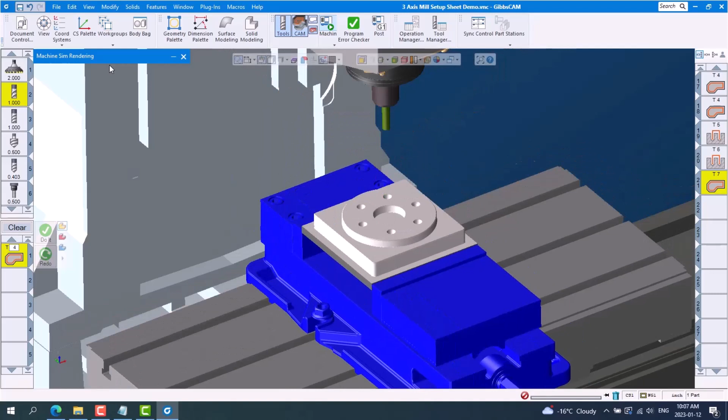In this tech tip, I'll show you how to produce a setup sheet from GibbsCAM that you can use to communicate with the shop floor to avoid costly downtime that can occur during the setup process. Downtime can happen when the setup person is searching for things like material, tools, holders, programs, and fixtures that were included during the programming process.

Setup sheets are an important communication tool between the programmer and the shop floor. Next, I'll show you the types of information you can include from GibbsCAM and how to customize the look of the setup sheet, which includes your very own company logo.

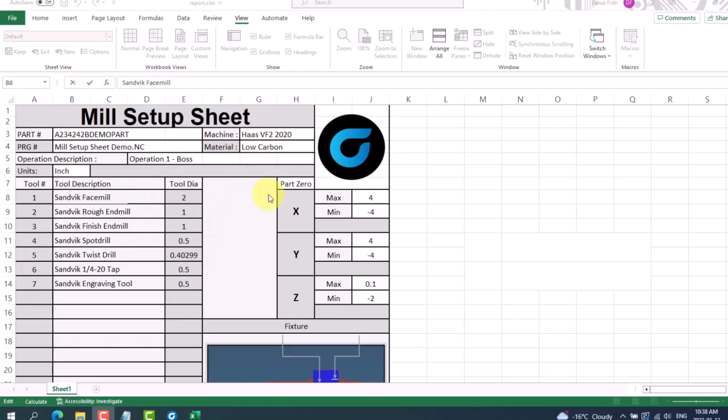Some examples of information you can include directly from GibbsCAM are part number, G-code file name, the operation description, units, tool numbers, tool descriptions, tool diameters, the machine, the material, part datum, fixturing, and an actual picture of the part.

Next, I'll show you where this information is coming from in GibbsCAM. If we look at our document control, this is where we get our machine from, our material, our units, the part, stock size, and origin.

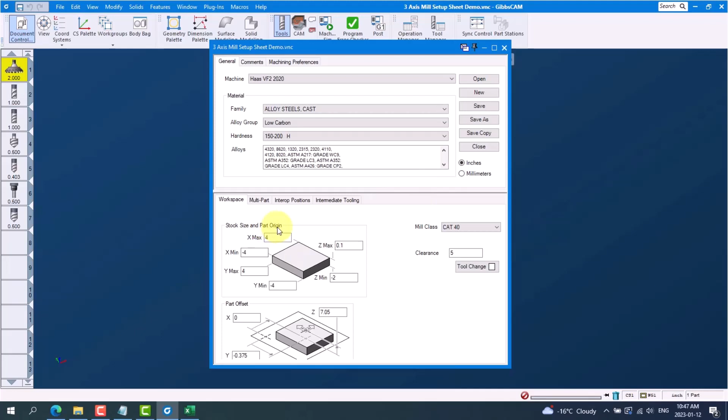And if we go to the comments tab, this is where we get the part number and our operation comment. Next, if we look at a tool, this is where we can get our tool number, our tool comment or description, and our tool diameter.

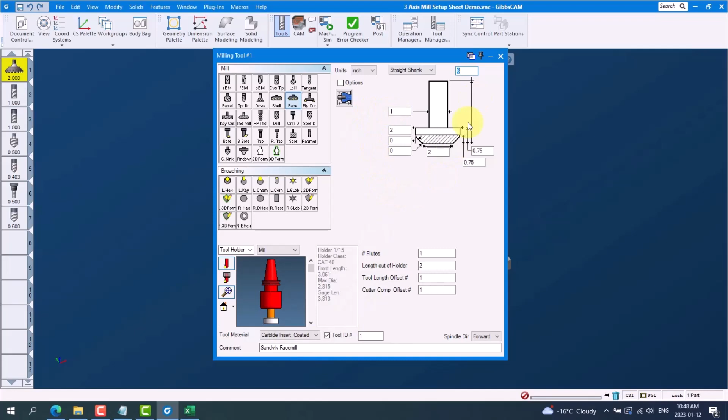Other information can be added to the setup sheet as it is fully customizable.

With a report like this setup sheet, there are two files required, an Excel file and a text file with the same file name. We have provided a setup sheet template. You can download the two template files in the description below and drag both of them into the report folder on your workstation shown here.

Here the two files are in the downloads folder. And now I'll show you the file path: C drive,

Program files, Cambrio, GibbsCAM, the current version you are using, plugins, data folder, report. You can copy the two downloaded files, the Excel file and the text file, and drag them into the report folder.

You will need to provide administrator permission to move to this folder. You can click Continue, and Continue for the next file.

And if I open the report folder, my GibbsCAM setup sheet is in there.

The Excel file includes the layout and look of the sheet itself, including titles and pictures such as the company logo. I'll now show you how to personalize it by copying your own logo into the setup sheet.

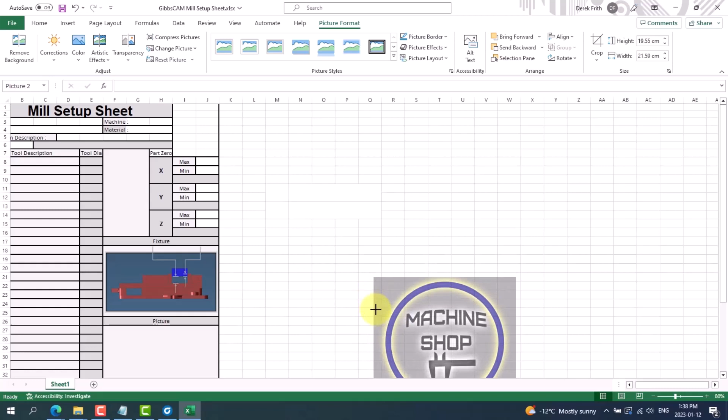It'll be inserted into Excel, which I can resize and simply put into place like so.

So once I have this logo in place and I'm happy with the look, I can save it. Go to File, Save. We now need to close Excel to allow us to copy the file over.

I'll copy the file from my desktop and drag and drop it back into the report folder. It'll again ask me to provide administrator permission to move to this folder. Click Continue, and we can see now that our setup sheet is in the proper report folder.

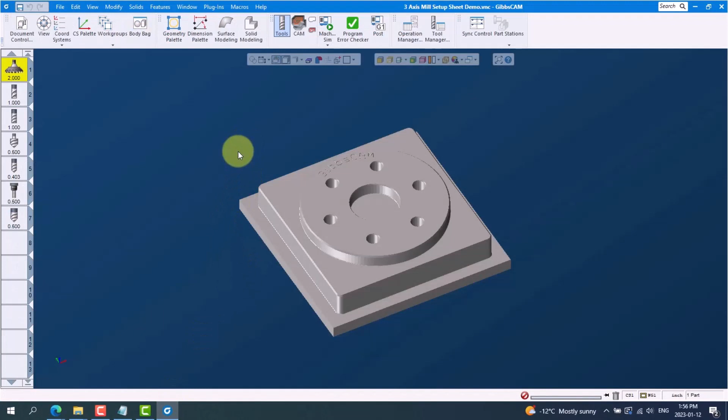And now we are ready to go back into GibbsCAM and follow these steps to print. We need to go to Plugins, under Main Tools, we go to Reporter. Click on the Custom radio button, find our new setup sheet in the list below, and press OK.

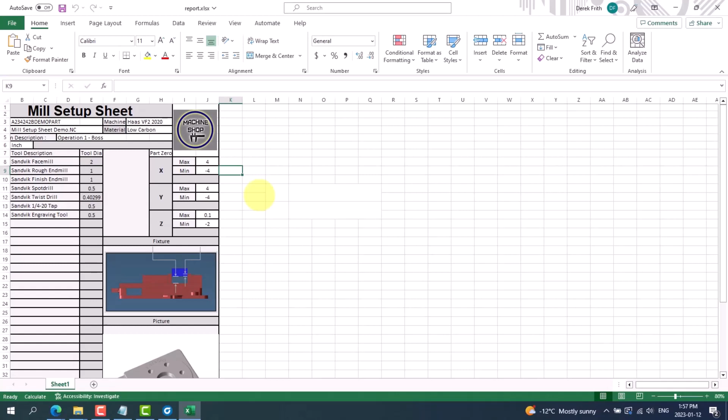GibbsCAM will load Excel and produce a ready-to-print setup sheet. This can now be printed and handed over to the shop floor. Now File, Print.

Creating these custom setup sheets will help you bridge the gap between the programmer and the setup team, ensuring a smooth transition from GibbsCAM to a completed part, which saves valuable time.